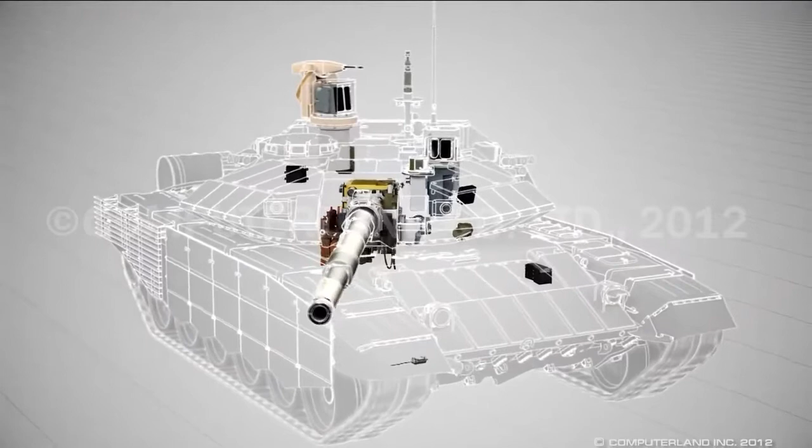2A46 M5 gun. The most advanced technologies and finest engineering concepts, well grounded in years of experience in tank, artillery design and manufacturing, are applied in the making of the enhanced 125mm gun. The improvements have provided for higher precision and fire accuracy due to the new constructive solutions and technologies introduced at the production stage.

The gun has a high rate of effective fire range with conventional ammunition. For example, with the APDS projectile, the range is up to 2700 meters, which is the best result in the world. The tank is armed with the improved 2A46 M5 gun.

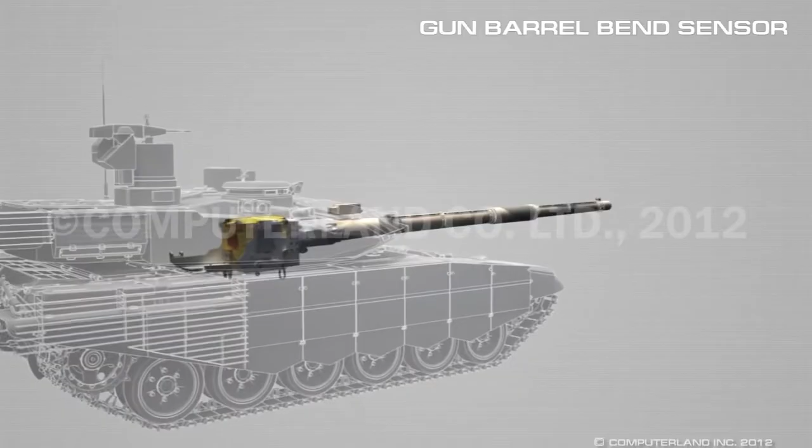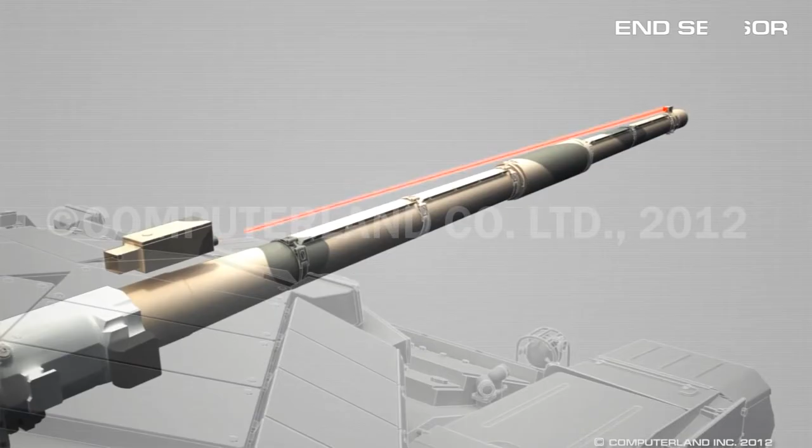In addition to the engineering solutions improving the gun itself, the 2A46 M5 is equipped with a barrel bend sensor to increase fire accuracy. This device registers the bending of the barrel, resulting from environmental conditions and interior heat inside the barrel upon firing, and enters the correction data into the fire control system.

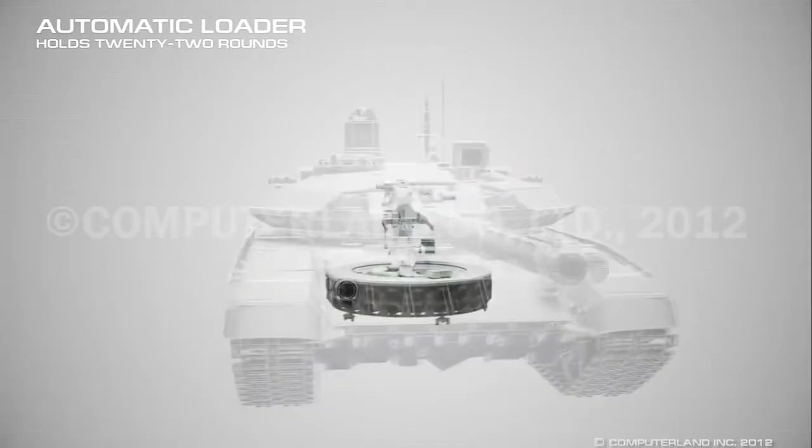The constantly high rate of fire is up to 8 rounds per minute, which is ensured by the automatic loader. The rate of fire is sustained on the move under any conditions. In this respect, the tank is unsurpassed and has no rivals in the world. The automatic loader holds 22 out of the 40 rounds the tank carries.

The tank's ammunition includes 4 types of gun rounds, which guarantee destruction of all enemy targets and successful execution of a wide range of fire missions on battlefield. HEAT shells are to destroy armored vehicles, brick and reinforced concrete structures, as well as manpower sheltered in field fortifications. APDS projectiles are designed to defeat modern tanks with combined armor protection.

The guided missile with a shaped charge warhead hits armored and heavily protected small-sized targets with high accuracy. In addition, it can be used to destroy low-flying helicopters. High-explosive fragmentation shells are essential in combat against manpower, artillery, and field engineering facilities.

The guided weapon system can effectively hit targets at a distance of up to 5 kilometers, long before the tank enters the destruction zone of the enemy, since modern tanks are normally capable of hitting targets with conventional ammunition at ranges of under 3 kilometers only.

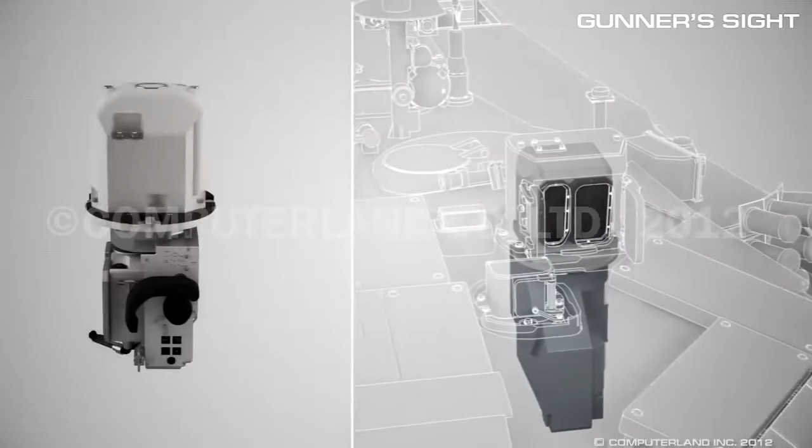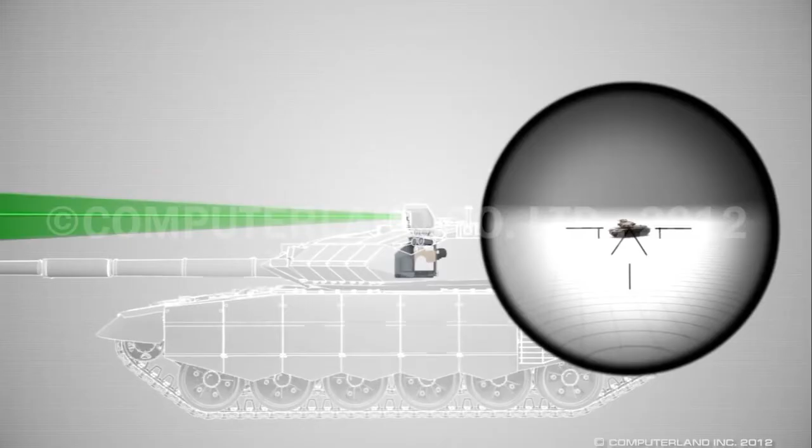The gunner's sight with 2-axis independent stabilization of field of view is multi-channel. It has a sighting and a thermal channel, a built-in laser rangefinder and a missile control laser channel. The sight enables the gunner to detect and accurately hit targets under any conditions. That is due to the improved optics and high-precision stabilization of the sight's field of view on both vertical and horizontal axes at 0.1 milliradians.

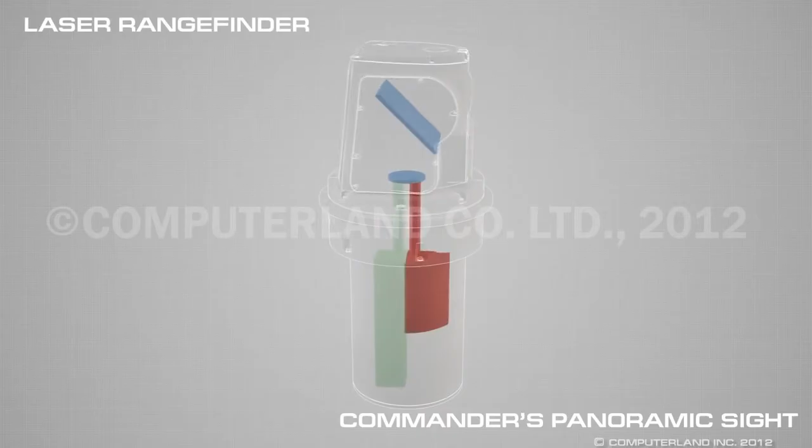Commander's station has been largely improved in terms of target detection, firing and combat management. For this purpose, a panoramic sight, 8 prismatic vision devices and the all-round video observation system are newly installed on the T90S modernized tank. Commander's panoramic sight with the 2-axis independent stabilization of field of view has a thermal and a television channel and a built-in laser rangefinder. It provides 360-degree target detection and tracking.

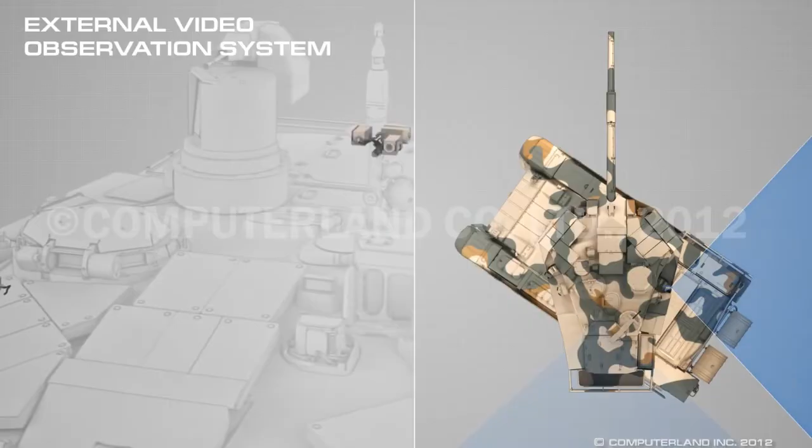External video observation system ensures the commander's all-round surveillance over the adjacent area. Its 4 television cameras can work in low light conditions. Commander's nearest visibility is simultaneously provided by the 8 prismatic vision devices located around the perimeter of the hatch. Each device has an indicator showing presence of the panorama field of view in the device's observation sector.

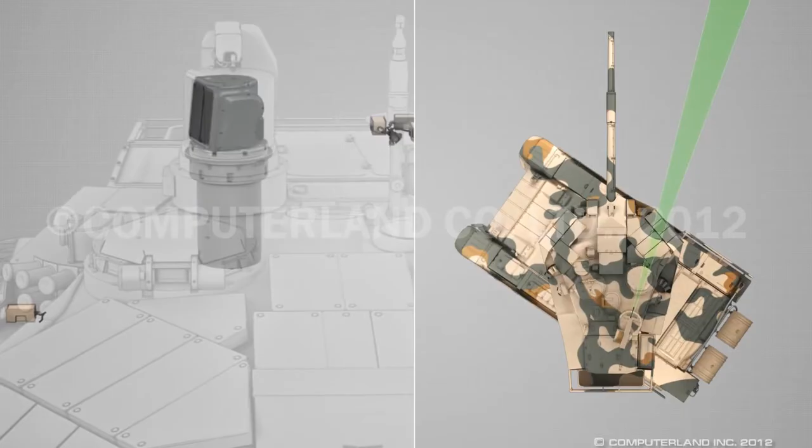There is a mode of aligning the sighting line of the panoramic sight with either a chosen prismatic vision device around the commander's hatch or the field of view axis of one of the TV cameras. One can also automatically align the panoramic sighting line with the direction on the electronic map on the commander's multifunctional control panel. All those functions significantly increase the commander's visual and searching capabilities.

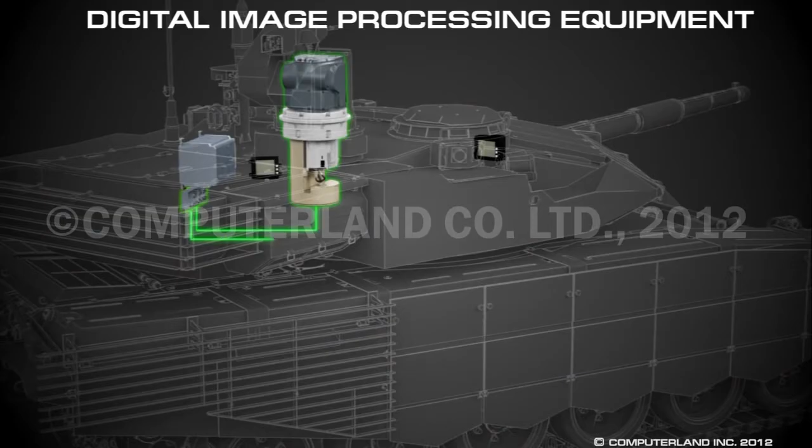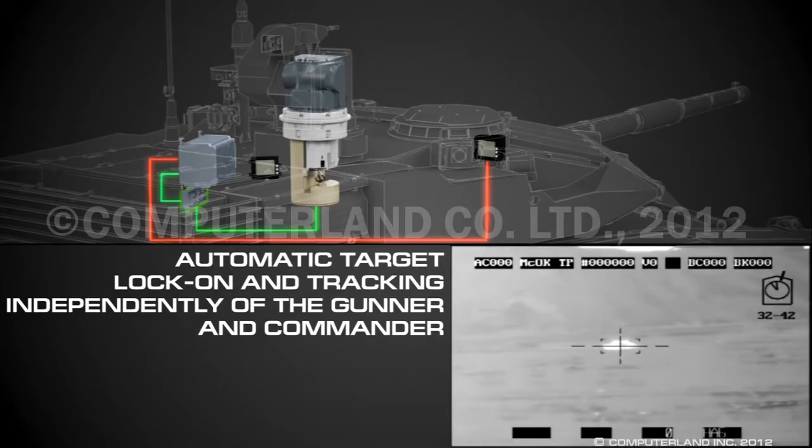Image quality of the commander's video viewing device is enhanced due to the system of digital image processing of the video signals from the thermal and television observation channels. Therefore, a T90S commander can recognize targets at distances of up to 5,000 meters. In addition, the equipment performs the function of automatic target tracking, and targets may also be tracked independently of the commander and the gunner at the same time.

The T90S modernized tank is equipped with a TV parallel sight shared by the gunner and the commander, who can thus conduct observation and firing when their respective sights are out of order.

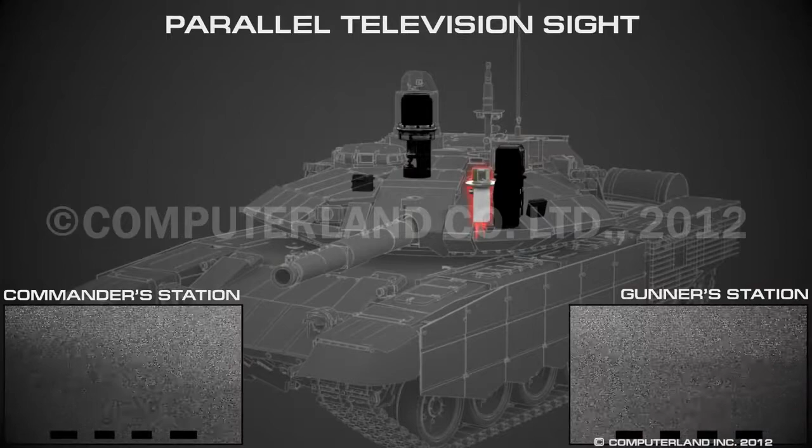The ballistic computer is there to provide automatic record of all data affecting the firing conditions right before the shooting. This eliminates errors in the input data and thus considerably increases the fire accuracy. Moreover, due to the flexibly reprogrammable circuit for calculation algorithms, one can enter the ballistic parameters for new types of ammunition.

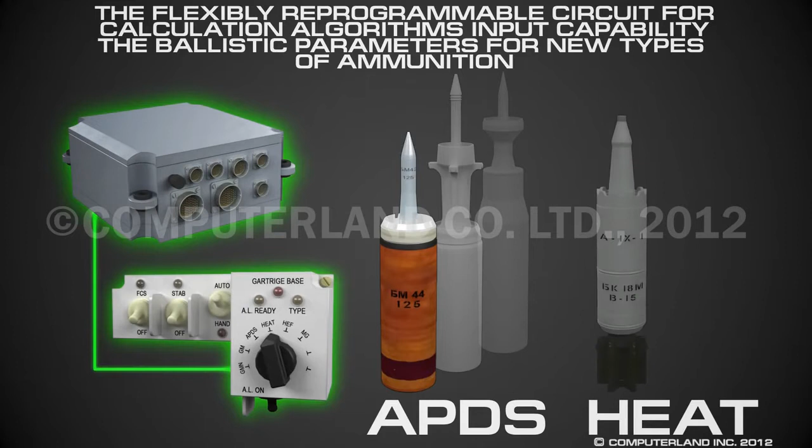A new weapon stabilizer is installed on the T90S modernized tank. It is based on digital technologies. This provides high stabilization precision and increases the speed of horizontal swapping of weapons. The maximum efficiency of the tank weapons in use is determined by perfect adjustment of the commanders and gunners' searching options and by the opening of their respective independent channels of target detection, tracking and destruction.

Those options realize the highly effective gunner-hunter mode of the fire control system, wherein the commander conducts observation and assessment of the tactical situation regardless of time of day, detects and recognizes targets, whereupon he, so to speak, passes the targets over to the gunner for extermination and goes on with the target search.

Implementation of new engineering solutions in the armament and fire control system of the tank brings about the following improvements. The target detection period is reduced. The preparation time for firing the first round is cut down to 10 seconds, which is the best rate in the world. The range of target detection is increased to up to 5,000 meters in daylight and at least 4,000 meters at night. The effective ammunition firing range has risen. The probability for the guided missile to hit the target is rated closely to 100%.

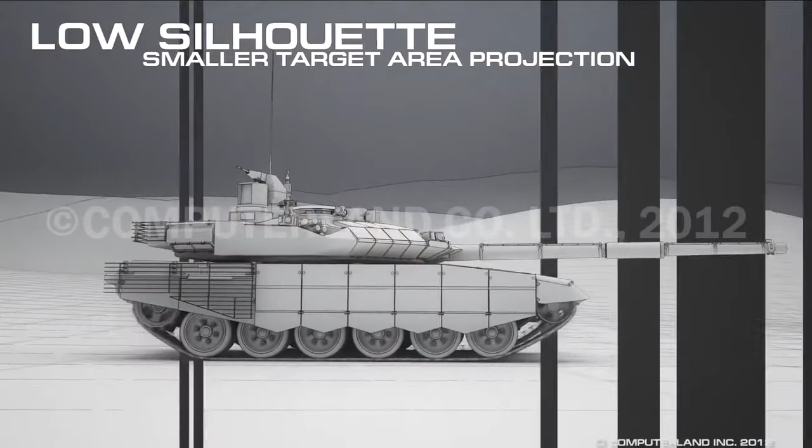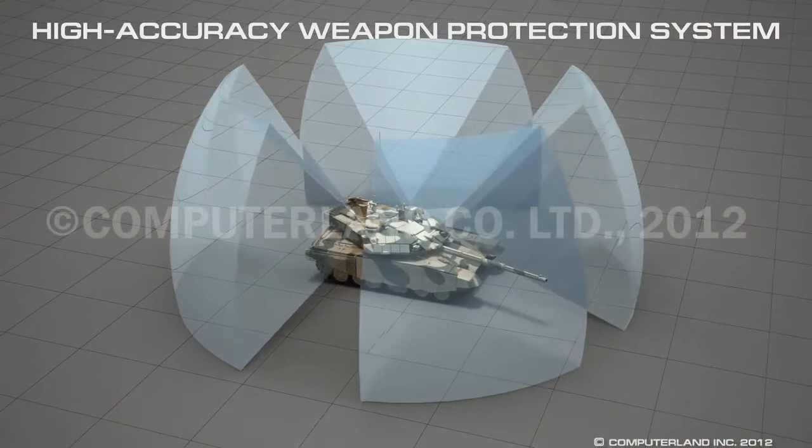The T90S modernized tank design retains the traditional Russian ideology of complex protection. In spite of the slight increase in the tank's weight, the vehicle has low silhouette and small dimensions. In combination with camouflage painting corresponding to the combat terrain and the heat shields around the power pack compartment, this makes the tank poorly noticeable on battlefield in both infrared and optical range and reduces the chances for its being hit. Once the tank is detected, its automatic screening system prevents the vehicle from being hit by anti-tank missiles.

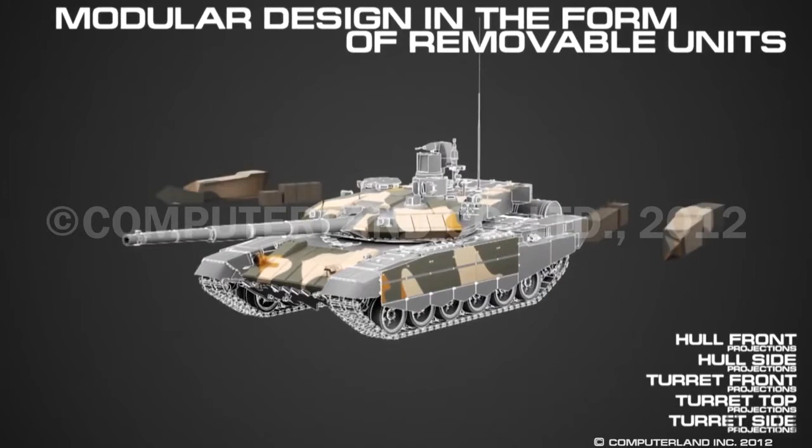Almost half a century of experience in creating dynamic protection for military vehicles and our world leadership in the design and implementation of such technologies have made it possible for us to develop the new integrated protection system for the T90S modernized tank, which is resistant to all anti-tank ammunition types and which is based upon the new generation modular principle. Additional security is provided by installation of louver panels to protect the power pack compartment and turret rear from anti-tank grenades.

With the presently achieved increase in operation safety, when bullets or fragments penetrate the dynamic protection elements, they do not detonate. Dynamic protection guarantees effective resistance to tandem warheads, secures the tank from the EFP ammunition types, and reduces the impact of shaped charges and armor-piercing projectiles to 80% and 50% respectively. An important advantage of the modular structure of the dynamic protection system is that it considerably simplifies repair and replacement of parts. The protection system is easily operated and maintainable even in combat conditions.

Stowage of the tank's ammunition allowance has been optimized. To reduce chances of explosion, the ammunition in the crew compartment, within the possible reach of the anti-tank means, is detached into a separate proof section. Security is maintained by the conic shape of the turret, dynamic protection system, and the ballistic container. Hence the high survivability of the crew upon detonation in the isolated stowage section. The ammunition placed in the automatic loader and in the additional stowage section for non-automated reload is locally protected by extra shields.

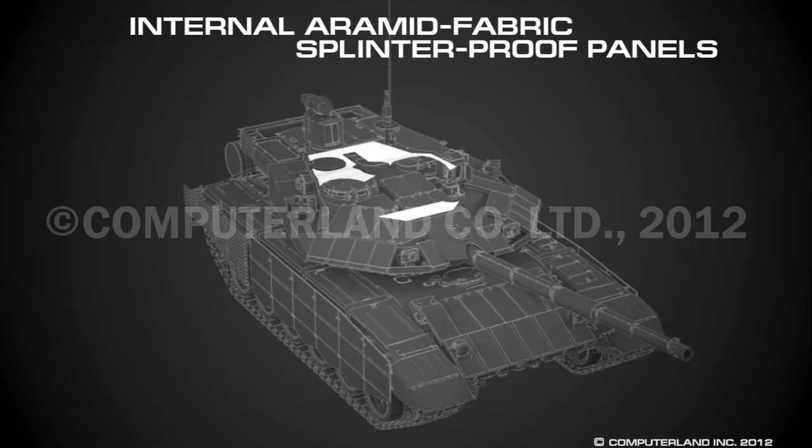Complex protection also includes interior anti-fragmentation panels made of aramid fabric to secure the crew and equipment from the secondary flux of tank fragments. For the outside protection of the sight windows, armored covers are installed, which are remote controlled from the crew compartment. To sum it up, a comprehensive set of safety-inducing measures has ensured the two vital features of the tank's protection systems, namely the vehicle's unsurpassed durability on battlefield and the high survivability of the crew under intensive anti-tank activities of the enemy.

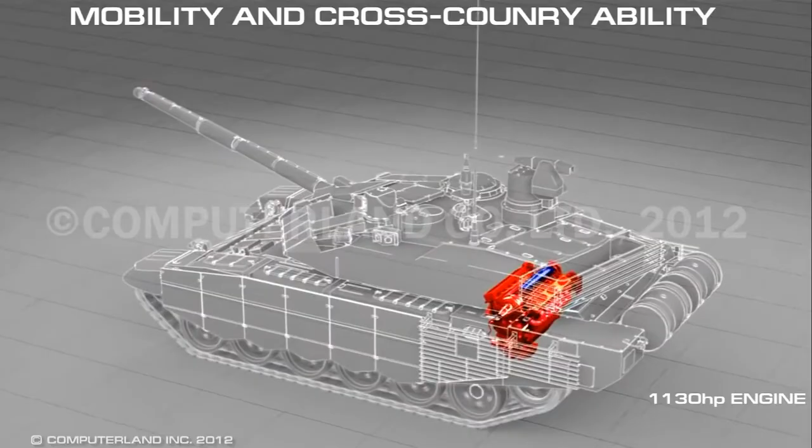The T90S modernized tank demonstrates high mobility and control, even under extreme heat and dust conditions. This is accomplished by the installation of the high-efficiency 1130 horsepower engine and the steering control system with automatic gear shifter and steering wheel control linkage. As a result, the tank is very fast and maneuverable. Its excellent off-road capabilities are due to its low weight, which allows the modernized T90S to confidently take any routes on and off roads and bridges in various weather conditions. Furthermore, its fine chassis account for the wonderful smoothness on the move.

The tank is equipped with a broadband 2-channel USW radio set, combined navigation system, and the equipment to integrate the tank into the division battle management system. The interaction control system provides the following. It receives signals by GLONASS and Navstar satellite navigation systems. It significantly accelerates the unit commander's decision-making in combat situation. It considerably reduces the amount of time required for tactical situation assessment and the crew's effective response.

In conclusion, due to the perfect combination of the vehicle's fighting and engineering strengths, the crew can successfully conduct military operations in various climatic and weather conditions at any time of day and achieve their goals in the complicated realities of modern land combat.